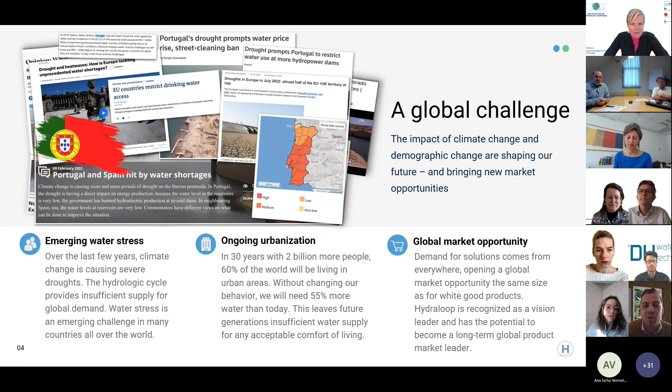This is actually our slogan, what we always say: act wise, use water twice. Because every home, but also a lot of buildings, have their own source of lightly contaminated water, grey water, which you can easily reuse for a second purpose.

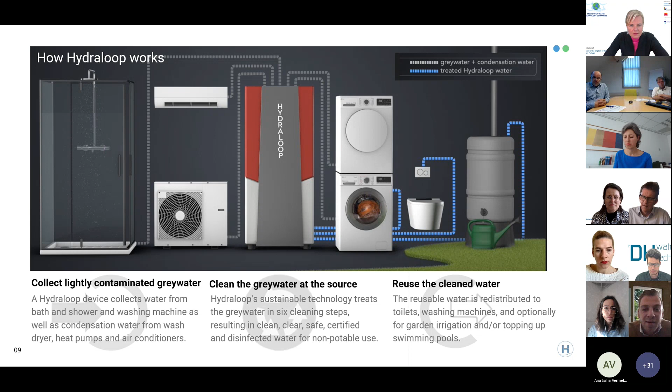So the treatment process, how does it work? It's a combination of 6 different treatment steps that already existed for a long time. What makes the Hydraloop special is that they are combined in our device. We apply sedimentation, flotation, dissolved air flotation, and foam fractionation. Step 5 is a bioreactor, and the last step is disinfection, which we do not do with membranes or chemicals, but with UV light.

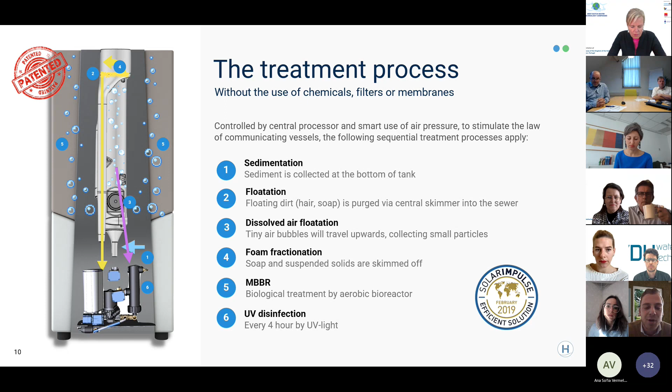Our Hydraloop treated water quality meets all the international stringent quality standards for grey water recycling systems. I'd like to highlight two: one is the NSF ANSI 350 certificate, which enables us to sell our solution in the United States market. Also relevant to mention, Hydraloop meets the new European standard for grey water recycling systems, which was launched last year.

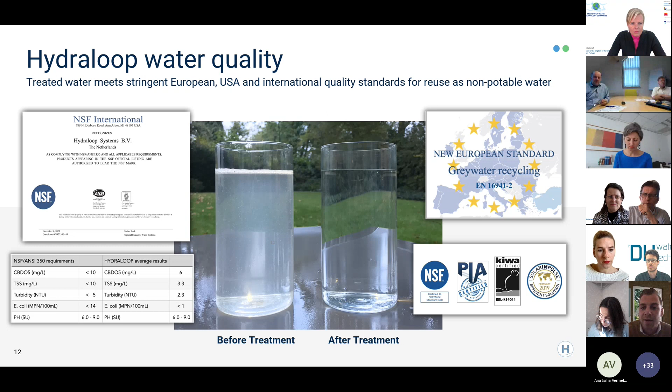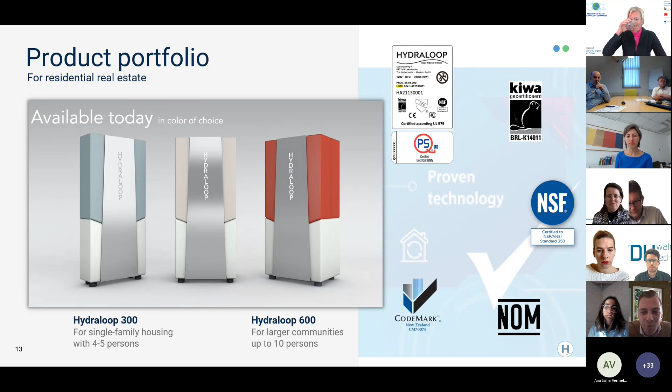Our product portfolio: we started with the Hydraloop H300, which you can see on the left. It soon turned out that people from the US need double the amount of water we need in Europe, so we started working on a larger unit as well - the Hydraloop H600.

A Hydraloop cascade - this is very interesting. You can see an example project at the bottom of the screen: a cascade installation where we will collectively treat all the grey water from 300 different student houses. What is a Hydraloop cascade actually? It's multiple devices put next to each other so they can help each other in their treatment. With way less units, you can treat a lot of water. This is very interesting for hotels, student housing, office buildings, sports clubs, airports, etc.

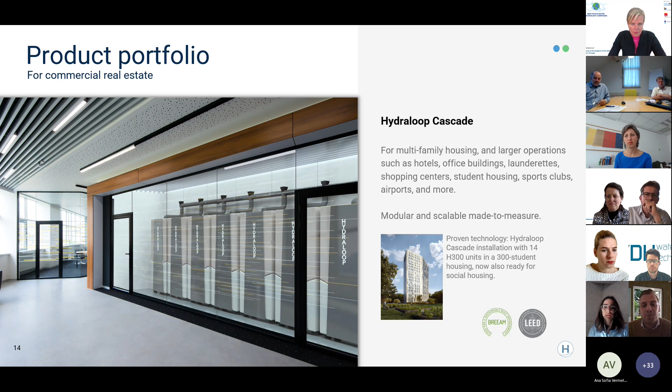This is a new product solution we worked on for months, years actually - the Hydraloop Concealed. Because not everywhere you have a lot of space available, with this Concealed version the device is integrated into the wall, which saves a lot of space. We launched this in January this year at CES, where we also won an innovation award in the Smart Home category.

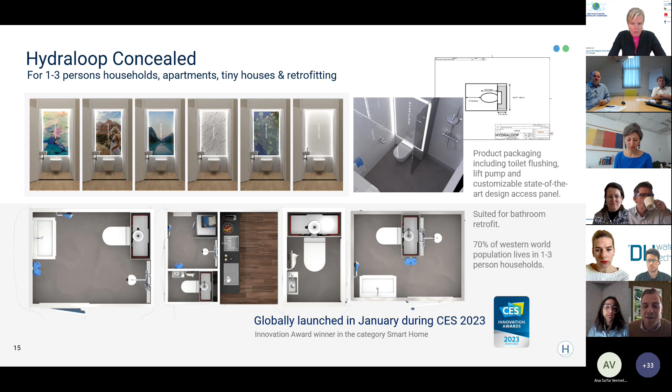At Hydraloop, we are very proud of what we do, but also of the fact that we get recognition from internationally acknowledged entities, like the WIPO - the World Intellectual Property Organization, which is part of the United Nations. Last year we won a prize for having the best intellectual property, so we're very proud of this.

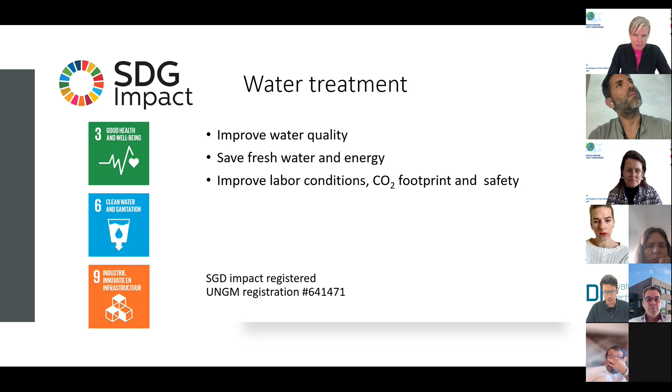If you can go to the next slide, please. So we disinfect the water by producing locally chlorine. So it's an in situ generation of chlorine. Chlorine is so far in the world the most used disinfectant. It's relatively cheap, in Europe relatively easily available, but it comes with some downsides.

You have to handle it, you have to store it, it loses its activity the longer that you store it, and you don't have control of what goes into the water because whatever you have in the canister or tank goes into the water. Now we take the three principles of how to get chlorine, being the salt, the crystals, some water and power, and we do this on site.

And because we do this on site, we improve the safety of the disinfectant as generated, the handling of it, which is then absent, and all the consequential items that come with that. But we also reduce these undesired byproducts.

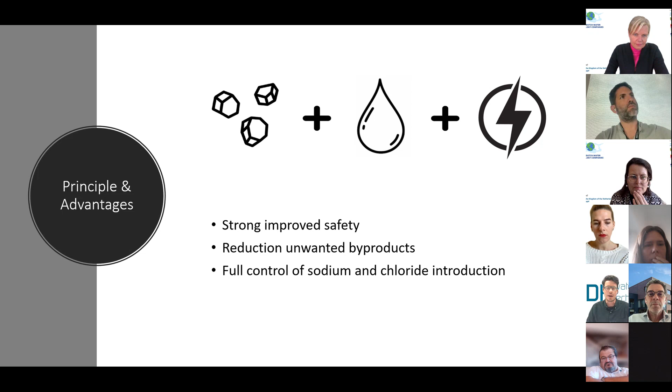Our systems that we have are set up in such a way that we give you full control of what you do want to do with the basics that come from the salt, being the chlorine, the chloride, and the sodium. I will go a little bit more in detail in that now, in the next slide. There we go.

Why it is that we give you that control. So there are the main two issues with using chlorine in water: first of all, to reach an effective disinfection, you need to be within a certain pH range. This has to do with the different forms of chlorine, which I will not go into, but ideally you would want to be between a pH of 6 and 7.

So the more that you recycle the water that you are using with industrial bleach, the pH level is rising. So in order to compensate for that, you would need to use a form of acid, sulfuric acid or anything like that, to reduce that pH again back to its desired level of between 6 and 7. So in another way, you are using one chemical to treat your water, and you're using another chemical to compensate for whatever that chemical does to your water.

That all increases also the conductivity and the salinity in the water that you are recycling. By using a locally generated pure chlorine solution, that effect is eliminated. Actually, the chlorine gas itself is slightly acidic. So if you take in water of pH 7, 6.5, you can recycle it many more times without that salinity being increased further.

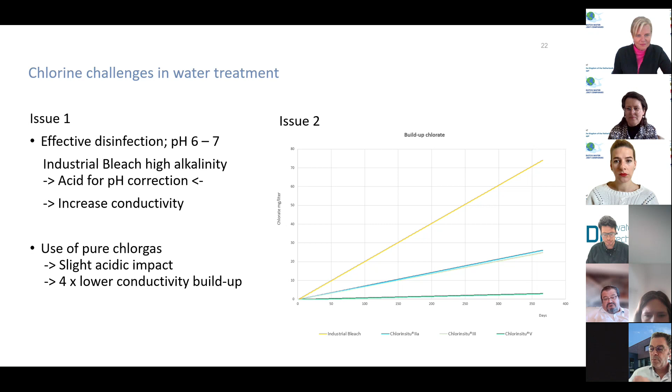In many applications, we see a major shift in the potable water industry to reduce salinity and improve chlorate levels while still using chlorine as a reliable disinfectant. We build disinfection systems for many larger European cities, but also smaller ones throughout the world. In food and beverage, we have a vast customer installed base to flush tanks, clean pipes, clean bottling lines, lubricate transport tires, etc.

Our main market is the pool market. Here we also do a lot of activity.

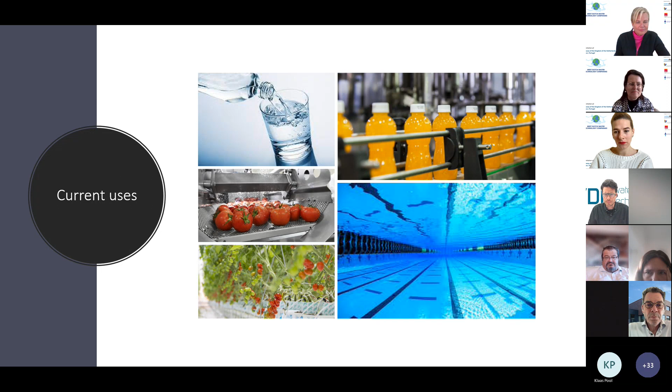We work with 4 types of products. We have extensive programs and maintenance packs available. There is over 40 years of experience, and we are quite active across the world.

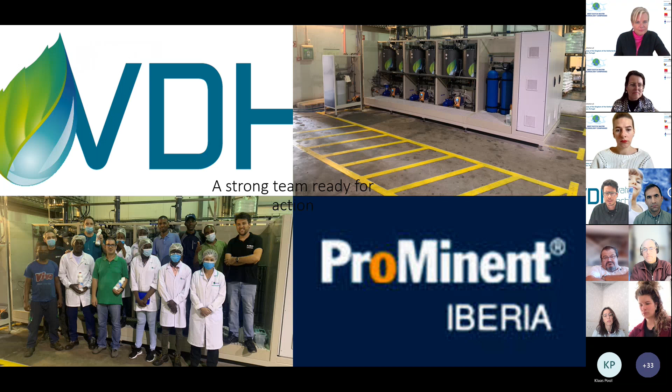We don't do it alone. We have a good partner in Portugal and Spain in the form of ProMinent Iberia. Here you see some experience from us together with the team starting up a machine. And the very last slide has the contact details of VDH, how to reach us. Thank you very much.

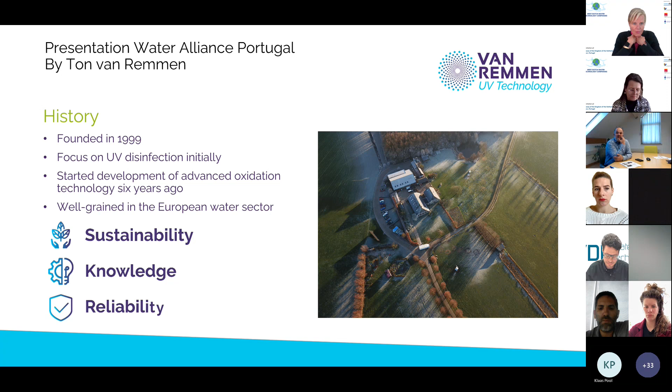We see around the world, as was already mentioned by Hydraloop, that there is a lot of drought, water is getting scarce, and water quality is under pressure. We are polluting and diluting our water with all kinds of chemicals, medicines, pesticides, and others, so it's not safe and ready for drinking water as such. Beside chemical pollution, we have Legionella problems, but also multi-resistant organisms that we're going to be facing.

We believe that with proper water treatment, not only UV but in combination with other technologies, we can create clean water for everybody. We believe there is an interesting proposition for UV as a non-chemical and reliable technology.

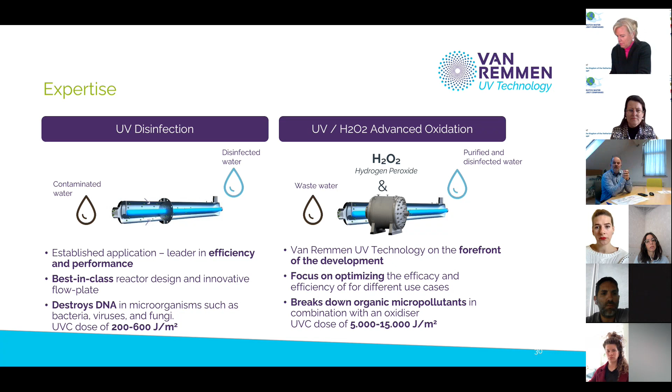For disinfection, especially for the Legionella market but also drinking water applications, we have a system based on the European standard for drinking water, which is validated. With a new controller we have continuous control on the reduction of Legionella, controlling lamp hours, temperature, flow, everything in real time so people can have a look at it.

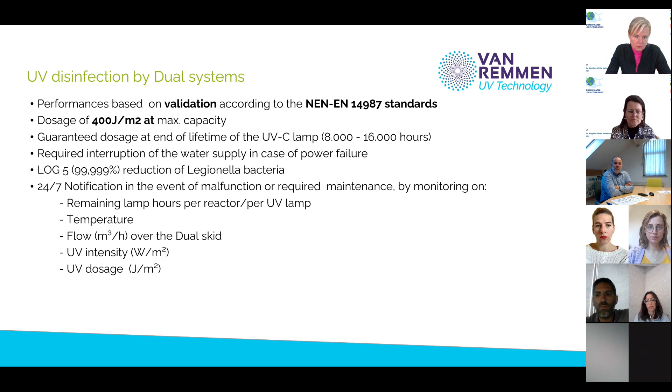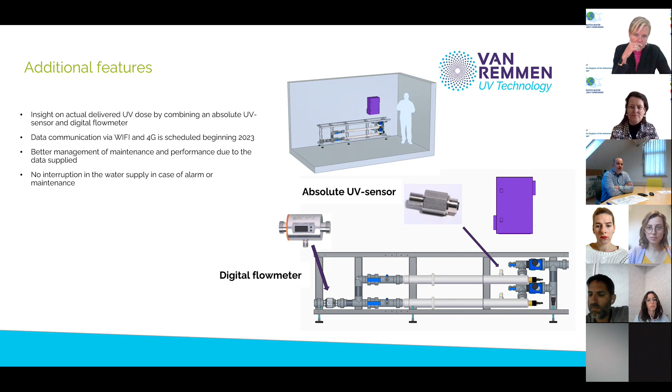This is a typical installation and the components used for this control, so you can see from a distance whether your system is working and your water supply is safe. We hope this gives people better insight into what UV is doing and how reliably it can work. This next slide gives an overview of systems at different capacities, which can be mounted after the water meter at the incoming water to treat it reliably.

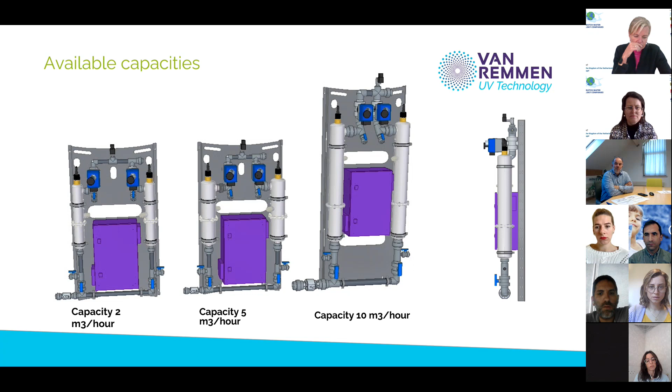Next slide, please. We're in a bit of a hurry maybe, but I'll try to be ready before the 8 minutes.

This is on AOP, so this is also disinfection, but here we focus on removal of chemical compounds that are not broken down organically, like medicines and pesticides, but also chemicals from industry in groundwater or rivers. We're focusing on reusing water a second time, so that water can be used again and again.

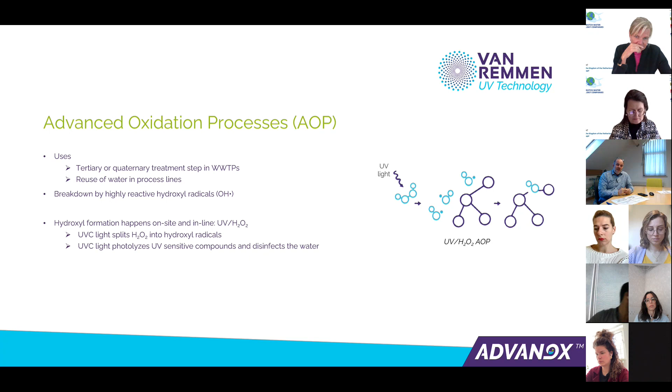The process applies radicals which are very oxidative, except for fluorine. They can therefore break down a lot of components effectively, so it's a very good last step in your water treatment.

Next slide, please. These are examples of products we've designed for this technology, optimized to a very high level so they're competitive with other technologies focusing on removing pharmaceuticals. We're oxidizing them, not separating them.

And the footprint is very small compared to activated carbon or ozone, and the big benefit is there's no bromate formation, so byproduct formation is not found. It's not selective, so it's active on all kinds of micropollutants, and besides oxidation and photolysis, it's also a disinfectant.

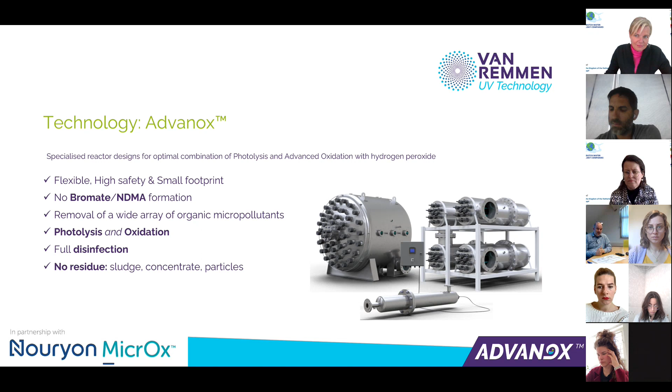Next slide, please. Here are some examples of this technology. One is in groundwater, one is in hospital water, where we're removing medicines but also contrast agents. In drinking water, we see that due to not having proper wastewater treatment, drinking water has been polluted more and more. The bottom left is a wastewater treatment plant where we treat the water as a fourth step so it can be reused for irrigation purposes.

Next slide. Well, this is the end, I think.

Oh, I have a lot of time over. No, I don't think so, but I think the horn doesn't bleep anymore, Marion. No, it's fine because we noticed it's the last slide. Okay, you kept it well within the 8 minutes, Ton. Thank you very much.

Yeah, you can give me 20 minutes or half an hour or a full day to explain about the technology and the advantage and the contribution to creating clean and fresh water. That's but unfortunately, Ton, we don't have that at the moment. I have one question for you, that's from Jad.

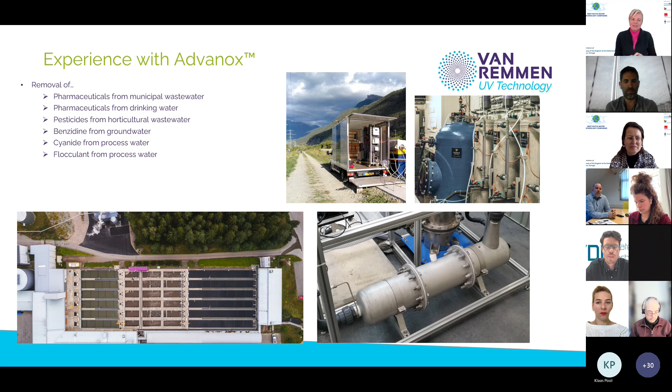Today I'm here to talk about NX Filtration, which is a hollow fiber nanofiltration membrane manufacturer, used to produce pure and affordable water for all.

On the left side, we can see how the entire system would look. I like to point out that our scope of supply is only for the membrane module itself, which would need to be integrated into a system by an OEM or an integrator with their pump, controller, and valve, etc. To the right, we can see a cross-section of the module with thousands of fibers. And even further to the right, we can zoom into a single fiber to see the internal layer by layer nanocoating of the membrane, which gives this direct nanofiltration properties.

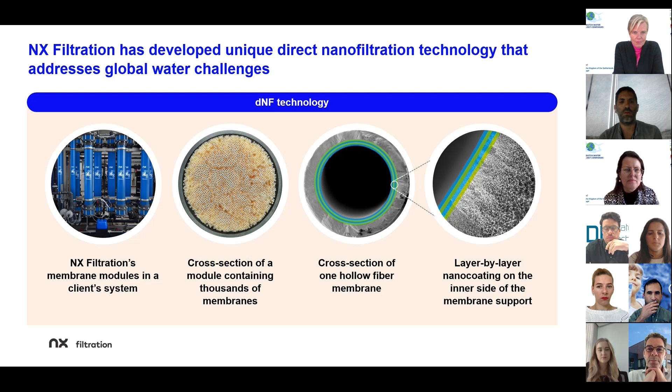At NX, we offer 2 types of nanofiltration membranes with distinct separation characteristics. We have the DNF80, which is a more open membrane with 800 Dalton molecular weight cutoff, and the DNF40 with a 400 Dalton molecular weight cutoff. Both can remove high loads of TSS, bacteria, virus, micropollutants. And the DNF40 can also reject selective salts, partial softening, and contaminants of emerging concern such as pharmaceuticals, PFAS, etc. So depending on the application, we would recommend one or the other.

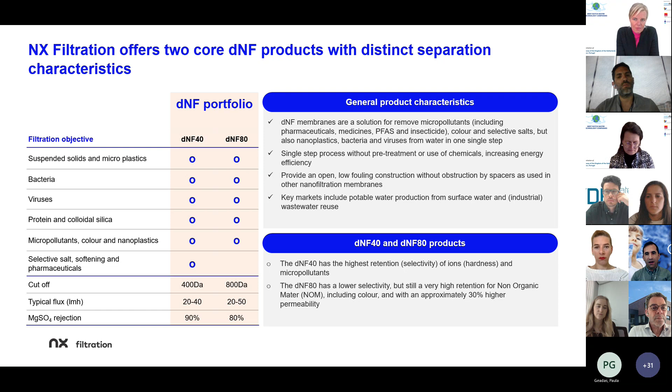In both cases, the properties of the membrane make it a single-step process without pretreatments or use of chemicals, which translates into increasing the energy efficiency. Our key markets include potable water production from ground or surface water, and municipal and industrial wastewater reuse.

Sustainability is at the core of NX filtration. Our membranes rely on 3 pillars for their production and application. We talk about a green chemistry related to our production, as our coating is applied by a water-based chemistry in contrast to conventional solvent-based coating processes. Also, our production spinning line is highly energy efficient thanks to our unique inline polymer mixing concept.

When we talk about energy efficiency, we refer to the application of the membrane in operation, as it requires less energy and therefore also realizes a significant CO2 footprint reduction. The avoidance of chemicals is because with this direct nanofiltration, we avoid the use of flocculants and coagulants in the pretreatment, and also the membranes require a low cleaning frequency thanks to cross-flow operation.

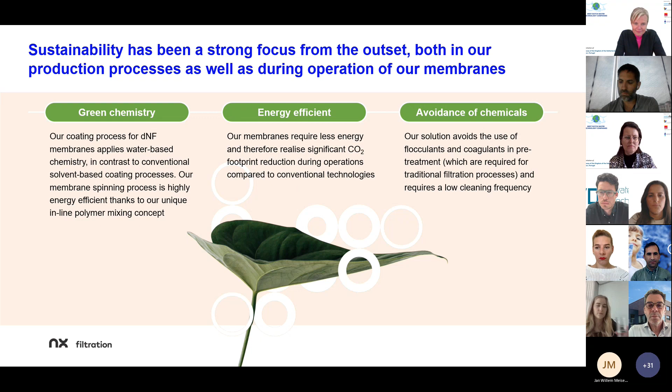This direct nanofiltration is an innovative and patented technology, which can be defined as sustainable, low cost, and a small footprint solution. It is normally used for drinking water production and wastewater treatment for the reuse of treated wastewater in the municipal sector, where we can also consider gray water recycling systems for hotels, commercial centers, residential areas, as was addressed before in other presentations about gray water. For industrial applications, it can also be used to optimize feed water quality, and it also enables the reuse of process water and wastewater, and finally also valuable materials recovery.

I can see Marja is putting some pressure on me, changing the slides. But next slide, please.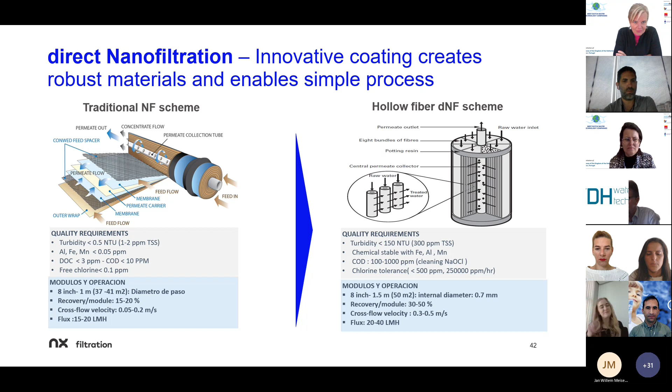And for high fouling waters, it will also replace the coagulation and flocculation process, which is normally combined with UF and spiral wound. So in both cases, it is a single-step solution, which brings energy efficiency, and it is a chemical-free process.

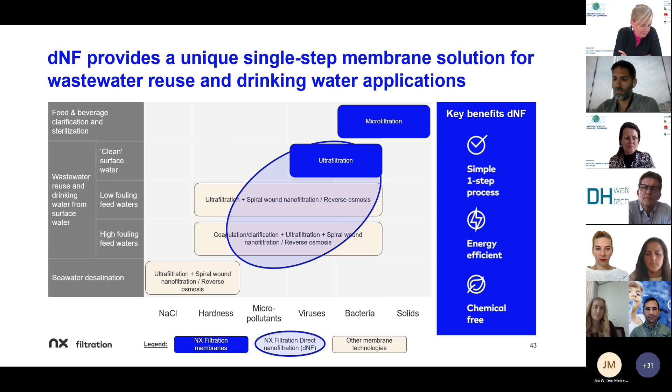This would just be another, more simple way to visualize it. Of course, you won't always need all these technologies, but many times it would be a combination of 2 or 3 of these technologies that could be replaced by DNF, which would only require a 150 micron strainer.

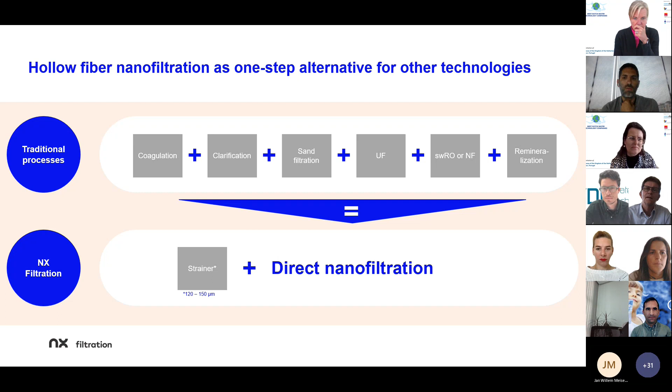Very quickly, a summary of NX Filtration's DNF unique features. We say it's a simple process, single stage, low footprint, one-step solution. Then also low OPEX with a total cost of ownership between 0.2 and 0.3 euros per cubic meter. It has up to 70% energy savings compared to UF and RO, and also chemical free.

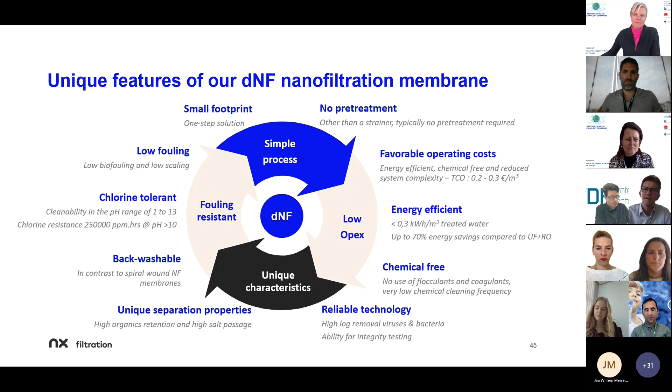It presents high organic retention and high salt passage, which gives unique separation characteristics. And finally, the fouling resistant property thanks to chlorine tolerance, and it is possible to perform backwash.

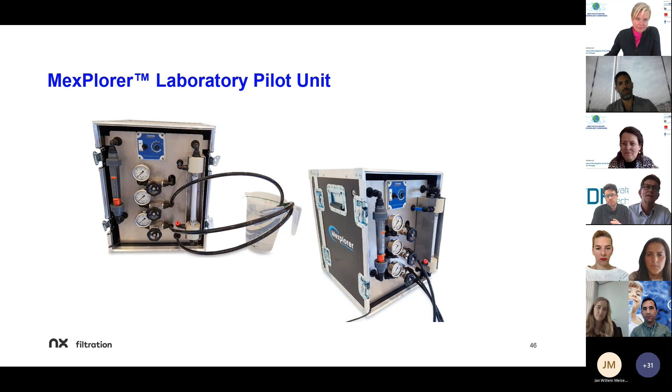I wanted to present the pilot fleet. This is our MexPlorer, which is a lab scale pilot just for a proof of concept. And if it's successful, we would move to an industrial scale pilot for further testing, where we get more information for a more accurate proposal together with our projection tool.

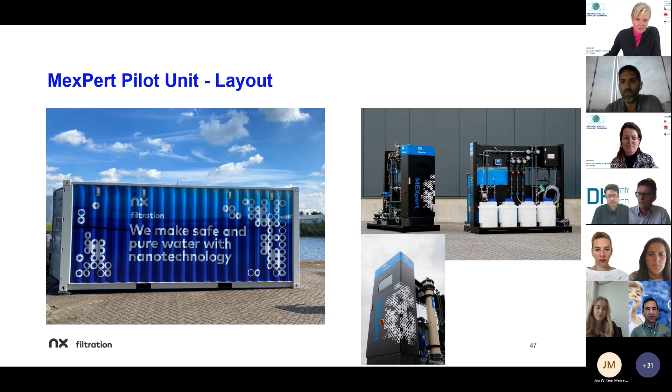And that is it. Thank you very much, everybody, for your attention. And I think I nailed it.

8 minutes. Well, yeah, you did perfectly, Ignacio. Thank you very much, Ignacio. Are there any questions from the public? Because if not, then I have a question. Oh, sorry, yes, Jad?

Yeah, I have 2 questions. I want to ask if you had a use case with a comparison between a conventional system and your system. And the second question is, any idea how much, because you're talking about energy savings in electricity, but how much do you save in water? Because in an RO system, you have a rejection of a minimum of 50% or 60% water reject. In your system, what are these figures?